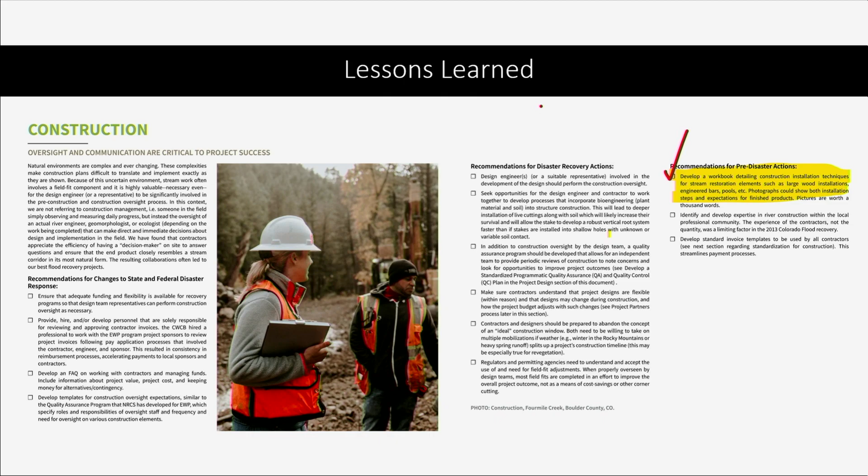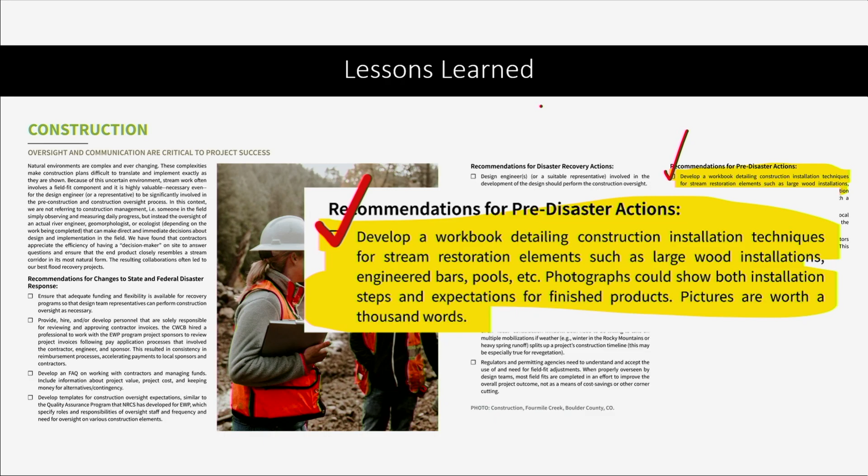We made this document by interviewing many of the folks that were in the trenches doing the flood recovery work to try to summarize the big ideas and give that information out to other communities. And so one of the big ideas out of construction was to develop a workbook to detail installation techniques, elements, basically try to create a document that could be worked with for contractors and for designers to bridge the gap. Okay, so we're actually following our own recommendation here with this new construction manual.

So looking forward now, after we've looked back at what we've done in the past and what we've gotten right and what we've gotten wrong, what are we trying to do here? Well, ideally, we're building projects that increase resiliency, increase processes and function in stream corridors. We need to assume change. We have to get away from the idea of static channels, right? So we're looking more to accommodating stream processes rather than trying to control streams.

We want to make sure that each project is going to be the best project it can be, regardless of which contractor gets chosen to do it. Okay, we can't just have our favorite contractors that do the work, but other contractors aren't going to do as good of work. If all of us are spending our money to do this restoration work, we want it to be great work.

So obviously stop making the same mistakes over and over, recognizing that sometimes less can be more. Trying to get away from the idea that we have to do all the things, bring out all the guns to make the work happen, but sometimes a lighter touch in our stream restoration work is important. And then we want to focus on the corridors, not just the channel. We've talked about that at length already, especially if you were here at the last session.

And then obviously trying to improve the knowledge base and expertise. It's us learning from all of you, and hopefully it's us infusing you all with some new information as well. But really this is a collective, and if you flip through this document, you might see some of your work in there. Hopefully you do. Hopefully it's in the good, and not so much in the bad. I'm sorry about that if it is. But we're all learning. I've certainly done things that I kind of regret a bit, like my younger self doing some work that I probably wouldn't do again if I had the option today.

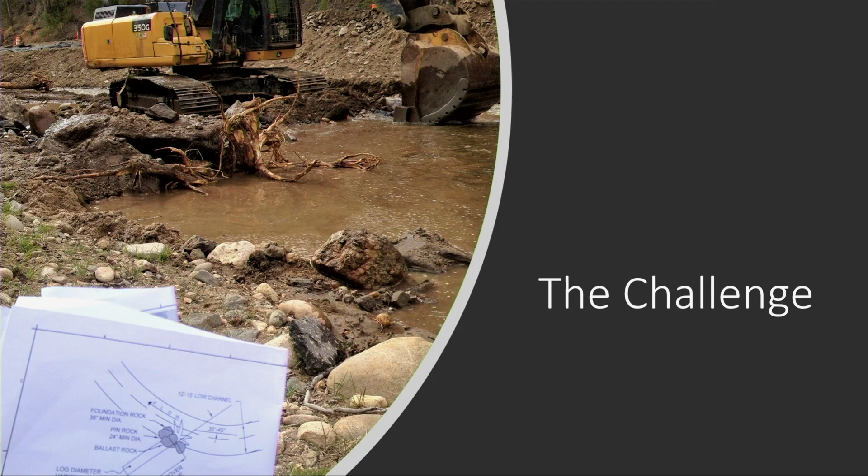And looking at plan sets that are well-intentioned and hopefully detailed and have all the different elements to them, but the translation of what that plan set looks like into what we want our stream corridors to look like, it gets lost a little bit. And so that's really a big reason for developing this construction manual.

So the vision is that, like I said to begin with here, there's an ethic of environmental stewardship. If we're doing work in stream channels, we hope the heck that we're doing it with an ethic of taking care of the land. We know that we should maybe avoid trying to overdo things and avoid some of the heavy hands that we have at times. And then, obviously, trying to naturalize a site and leave the site better than it was.

Can we do stream restoration work where when we walk away, maybe give it a couple years for revegetation to happen, but can we go back to a site and not know that there was restoration work that took place? Wouldn't that be amazing? How many folks have driven down a corridor and been like, oh, yep, can tell that was a project? Ideally, I'd love to not know that there's a project that happened there. We want things to blend in.

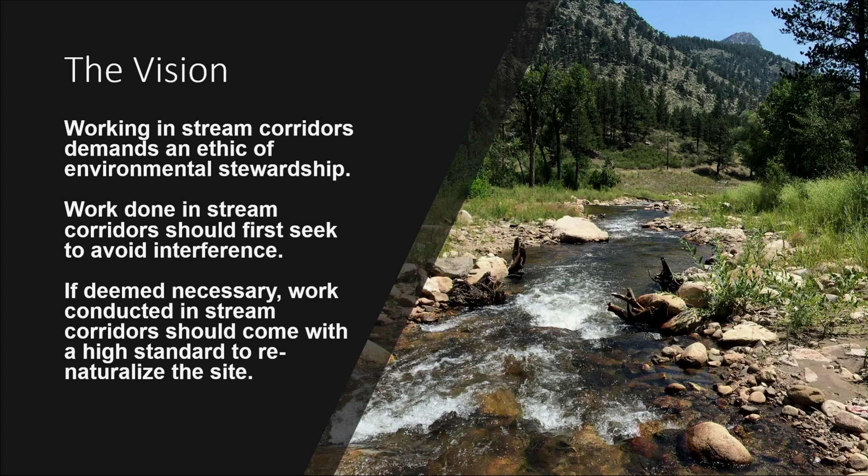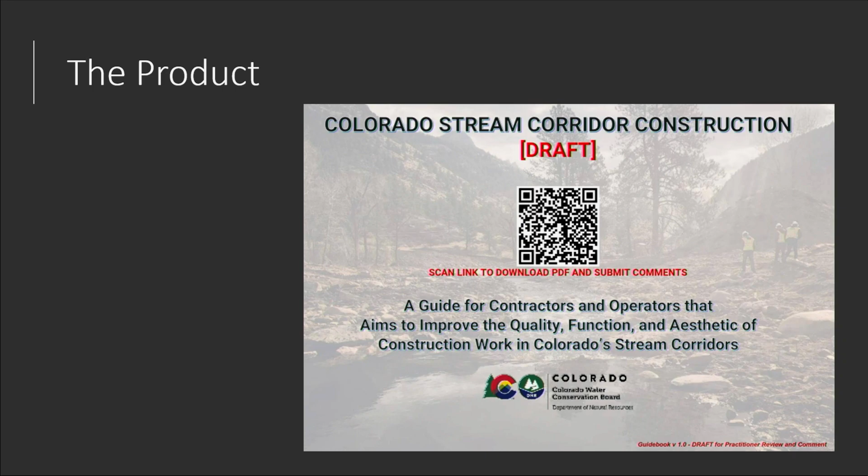When we leave the site, we want the site to look as natural as possible and, as soon as the vegetation comes in, have it over time blend in and just become part of the rest of the corridor. So what we did, we developed the product. The first printing is available on the display table at the Colorado Water Conservation Board's table, down in the basement there, whatever it's called. And I'll run you through just a few, in the time I have, of what we've got in the contents here, since you all can't look at it with me.

But essentially, we're trying to take the general practices that we find across the gamut of stream restoration and categorize them. There's a section on clearing and grubbing, and as Andy said yesterday, decompaction. I don't know how you did that. Decompaction. And then we've got a big section on channel shaping, bed forms, habitat, these typical elements that we'll find in a lot of restoration projects.

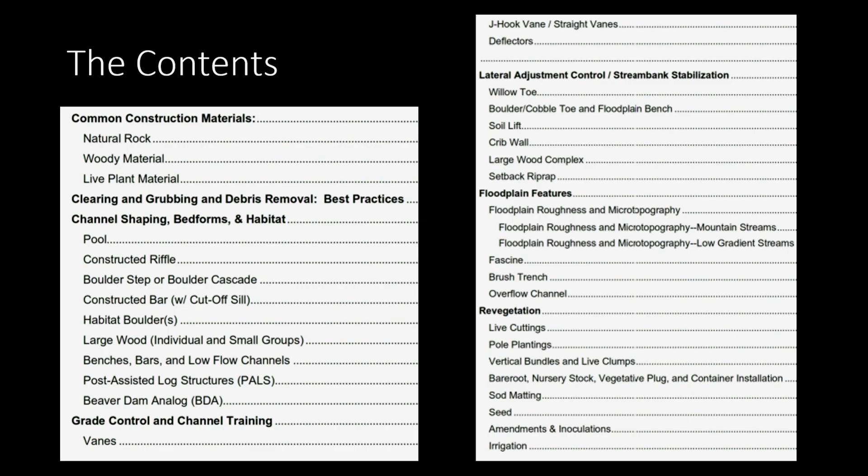We've got a section on grade control and channel training, another section on lateral adjustment control and stream bank stabilization techniques. We've included a topic on floodplain features, including microtopography for mountain streams and plains streams, kind of low gradient. And then revegetation, which is not all of our expertise, but trying to pull in the best information that we could find out there. So we hope that it's organized simply.

And sorry, I'm kind of realizing I might be cutting you all off. I'll go cut these people off on this side of the room.

So basically we want this to be a quick reference when you're in the field. Description and purpose of what the feature is. So you're a contractor, you're told we need to put habitat boulders in the stream, okay? Maybe you're part of a design team where someone else designed the project, but you're out there doing construction oversight, okay? There's habitat boulders, great. Maybe in your head you know what they are. Does the contractor know what they are?

Description and purpose, maybe why they're used. Other names that you might find, for cross-reference. Typical materials that are pulled in for these types of projects, the equipment that you might typically use to place these things, just in case there's any sort of, well, how do we build that? What equipment do we want to bring in? Installation fundamentals, the basics, right?

Try not to F this up, and hopefully you'll do a good job. Potential enhancements: these are good for maybe going to the next level, maybe a discussion that happens on site or in the design room or in the field with the contractor, trying to think about how to raise the standard a little bit. A lot of this stuff is trying to incorporate live cuttings or other materials into some of these structures at the time of construction.

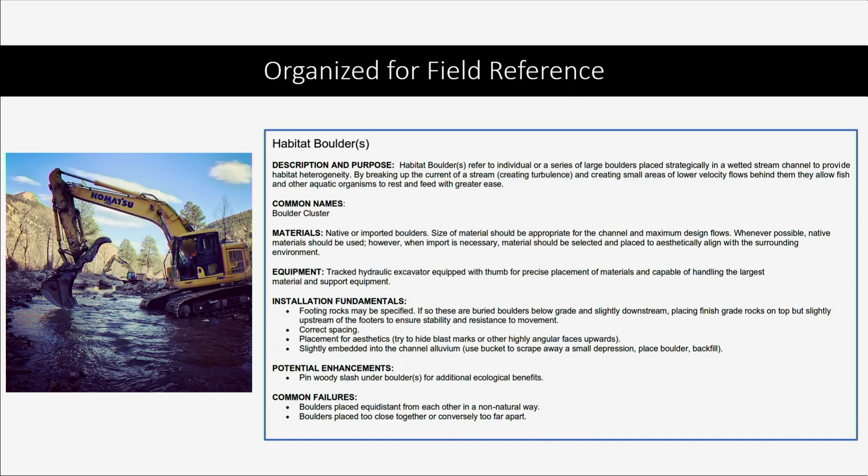And then common failure mechanisms, and this is what we witnessed in doing the measurable results program. It's what we witnessed from doing flood recovery construction oversight. So it's organized photographs. Pictures are worth 1,000 words, and we try to describe what we've seen from doing our construction oversight, and make it even simpler by quick referencing with green checks or a red X. Maybe not our idealized version of what we would like to see.

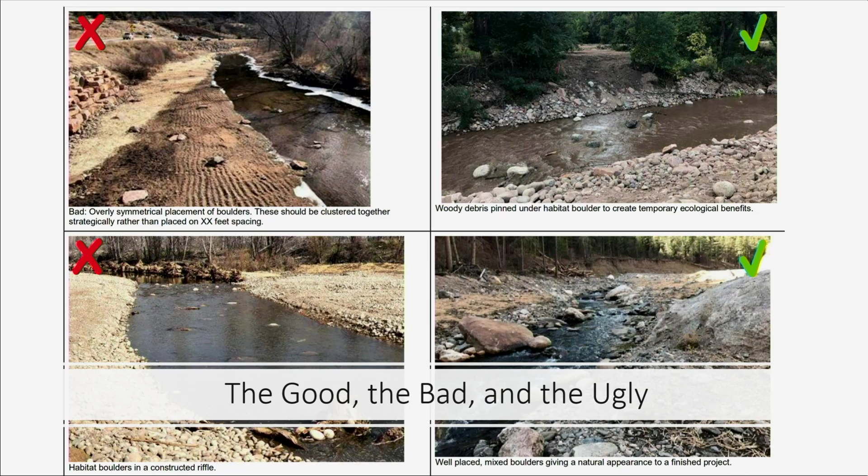We tried to include a lot of photographs of the construction process. If you all are building stream projects in the future, please document the process for us. There's a lot of good new techniques. This is not comprehensive by any means. This is a living document. We want the community to continue to contribute to this to make it better.

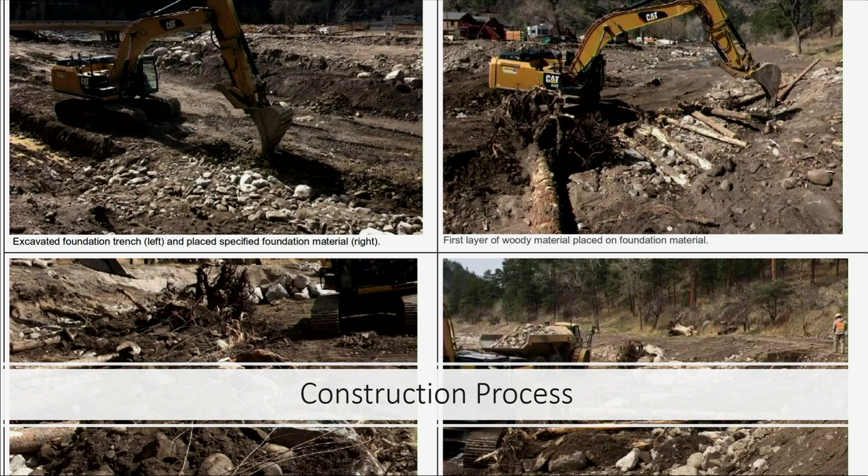But documenting the construction process, it's really nice to be able to go out there with a contractor and talk to them about laying a foundation. What does that look like? What is the first course? Maybe this is a large wood revetment. What might that look like? It's not going to be exactly the same. Obviously, each scale and each site is going to be different. But in general, rather than just using our words, now we have some photographs and other things to reference with our contractors.

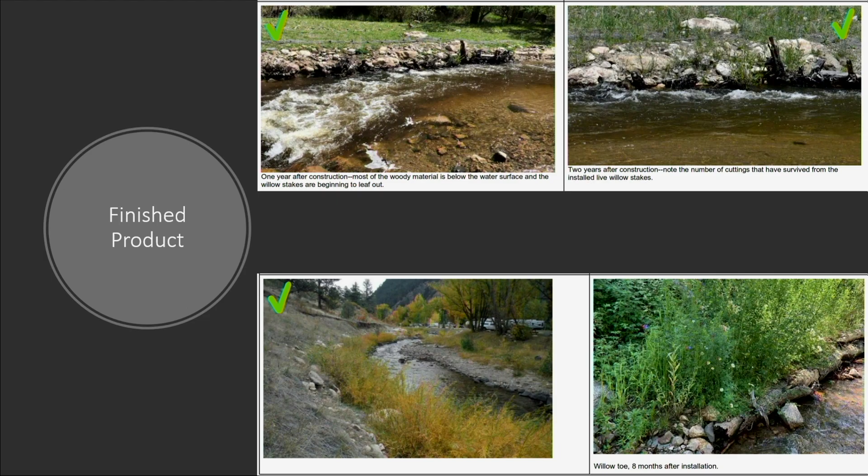Finished product as well, we feel like that's a great idea because we have these black and white CAD drawings. We have our arm waving, but maybe to show the contractors, this is what we're going for at the end of the day, or this is what this is going to look like in a couple years. So we tried to include photographs of that.

Again, sorry, not sorry. Some of the work that we've done out there can be better. I can critique myself as well, but there are some photographs of things that maybe aren't our best practice, and we don't want to continue to have those. We'd like to just raise the bar, I guess, is what we're trying to do.

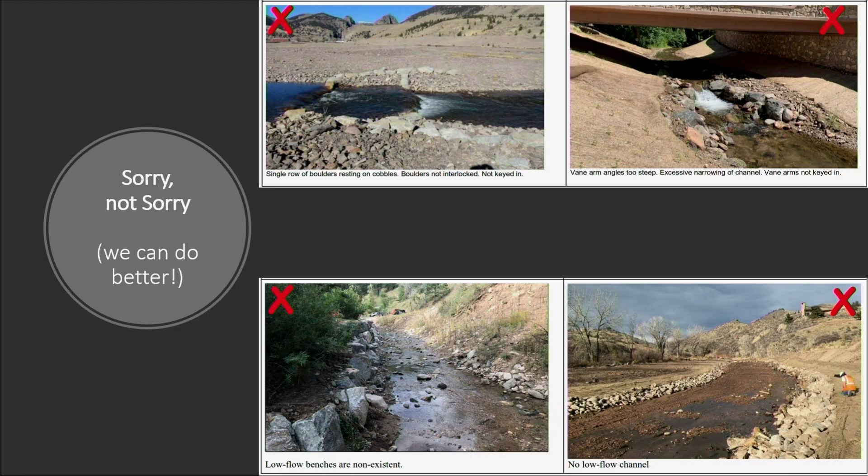So how can you reference this or use this? Hopefully, if you're a design team and you're recommending some of these construction techniques, some of these elements in your stream channels, then maybe you could consult the book to make sure that you're thinking about the construction process, how things are going to get translated from your design work and your CAD drawings in the field, maybe including some elements that you find in this reference into your design or your details. And then when you're in the field, maybe handing it to your contractor too, highlighting some things, circling some things, whatever it is.

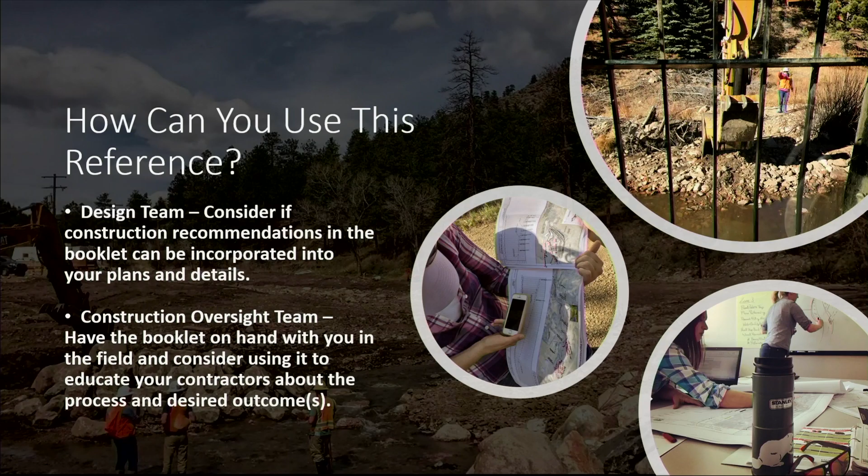And again, living document, I think I'm short on time. So this is a pole planting, right? I don't have a lot of photographs of it. The four of us couldn't really come up with good documentation. So please submit more of your ideas and more of your experiences to us.

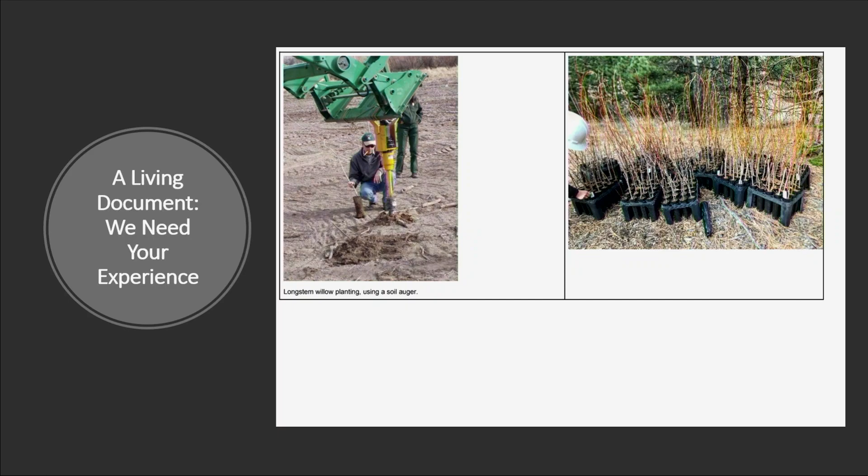And I think what I'd actually like to do, as I'm preparing this presentation and talking with some of my colleagues, maybe we'll also include a submit your new element form or something like that. Give us the description of what it is, give us some of the construction basics, some of the things that might go wrong with it, submit some photographs, and basically help us build this document for our entire community.

So, good on time? You're doing great. Great.

David, for you. Questions for me, or for the other peers of mine here that helped me write this document? Yes, sir. Hey, Morgan, sorry. I got a screen in front of you. I'm curious, I know the state's getting ready to update their design criteria. I'm sure you guys want to incorporate a lot of the structures. Are you taking some of this information and going to feed that design criteria, or how are those two things working together? Yeah, well, they will work together. Okay. Well, 'cause, yeah, I think that

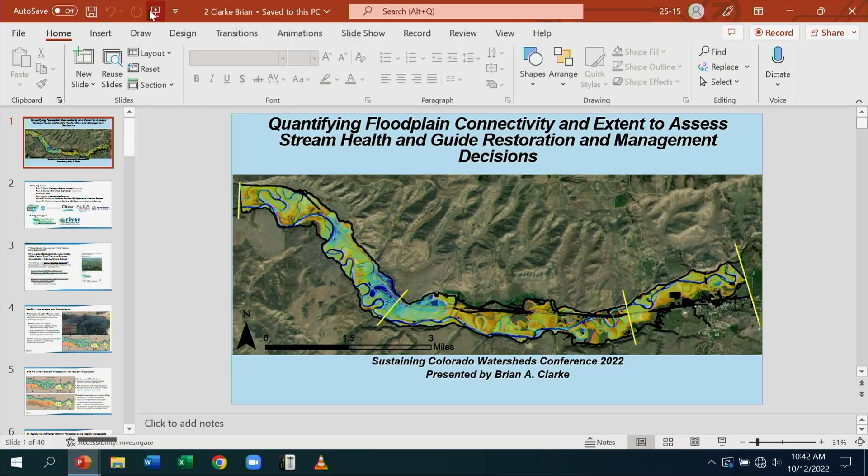Thank you, Michael. Great presentation. And just a quick reminder for everybody, I'll reiterate it too. This document's not a you should thing. Nobody told us you should do this. So if you're looking through it and you're saying, boy, they should have done a better job, start thinking about how you can make it better, because that's the request. Please commit to get some of your photos to us so we can make it better.

Thank you. Next up, we have Brian Clarke. He's going to be talking to us about how much space do rivers need.

Because of a shift scheduling thing with Batman, Brian actually fights crime by day and moonlights as a mild-mannered geomorphologist at night. While he normally only uses his powers for good, Brian's abilities allow him to cause avulsions simply by staring down the river. Rivers meander so they can go around Brian. And glacial retreat only occurs because Brian has entered the valley. While his work focuses on process-based restoration, conservation research, and fighting crime, his true passion is playing in rivers with his dog, Bella. And despite what anyone may tell you, Brian's actually 6'6". He's just always standing further away than you think. Same for me, buddy. Same for me.

All right, thank you. So yeah, we're going to be talking about quantifying floodplain connectivity and extent in order to assess stream health and give some guidance for restoration and management decisions.

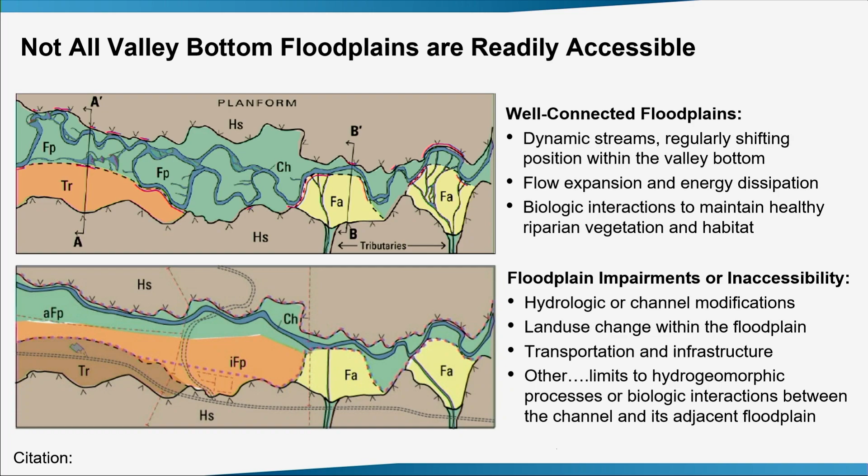And we're using those valley bottoms. So they are critical to people. People aren't gonna be grazing up on the hill slopes or living up on the hill slopes most of the time. So we use those valley bottoms, and that limits the width we have in the valley bottom. Not everywhere can be a stage 0 beaver meadow, as much as we might want it to be.

Oh, and we have a double slide.

Okay, so our question comes down to, how do we quantify how well connected a healthy riverscape is, and how do we quantify the floodplain restoration potential and targets for improvements?

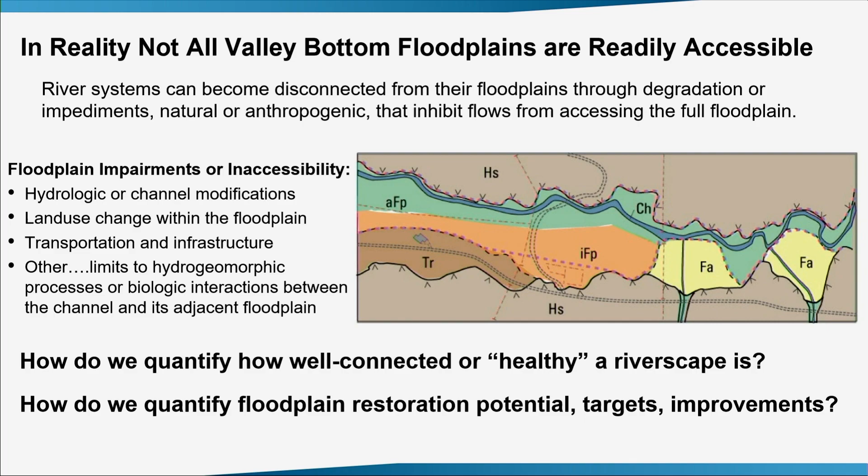And so this is our same slide, which should have been the only one. Okay, we'll go in the right order.

So in order to get at that, we're gonna go inside the valley bottom margins, or FHZ boundaries. And so the first thing we do is identify our maximum potential floodplain extent, and that is the maximum plausible area that could interact or be influenced by floods or fluvial processes under a natural flow regime. And so this could be the same as a riverscape margin, this could be the same as a fluvial hazard zone boundary, or this could just be identified as the historical or natural floodplain.

So the next thing we do is go inside that valley bottom and look at the active floodplain extent. Oop, this isn't working. So, and that's areas where inundation during either frequent duration and frequency by either low or moderate flows, that's kind of the bank full to annual, maybe the 2-year event, are capable of maintaining that riparian vegetation, those biologic interactions, and keeping healthy geomorphic and ecological processes.

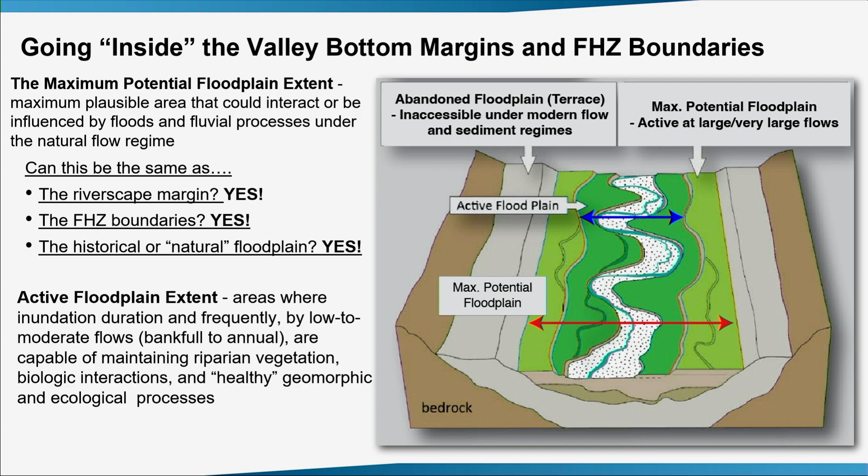And so once we've identified those two areas, then we can look at the floodplain connectivity ratio. And that is really just a proxy measure for the proportion of the valley bottom that is actively and routinely engaged by those moderate to frequent flows compared to our full floodplain width. And so we're looking at just those moderate flows compared to areas that are activated versus the large and very large flows.

And so to just kind of give some examples of how this worked, we've got some selected sites from our Yampa remote assessment work. And so first we're gonna look at something with some moderate resolution data. This is right near the town of Craig as an example, and then we'll move on to these priority areas where we apply some higher resolution data.

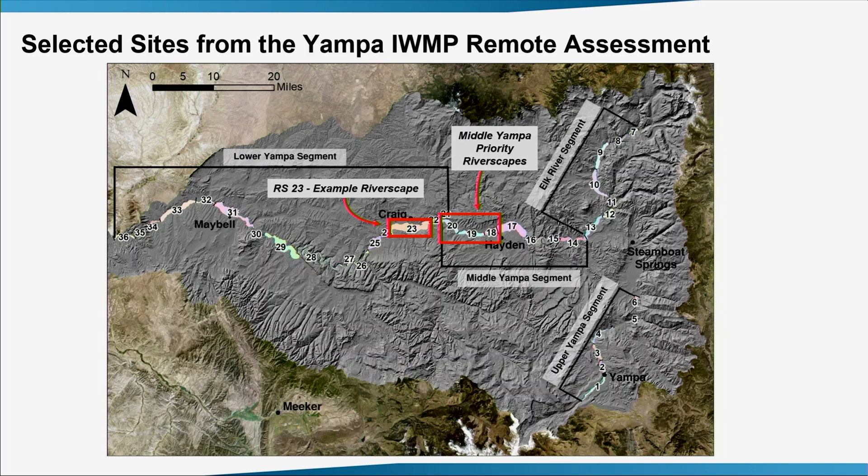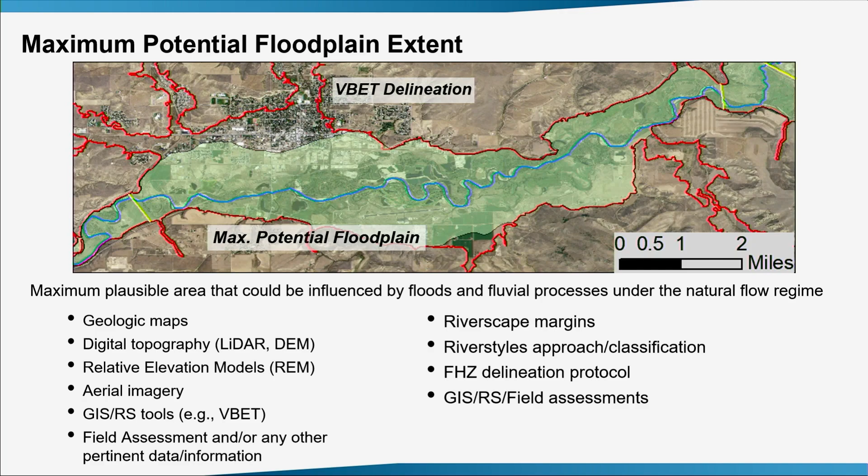So, first we start off with our maximum potential floodplain extent, which I think a lot of us have done using any of these techniques. We pull out the geologic maps, digital topography, relative elevation models, all the way through our whole toolkit. And here we applied the VBET delineation, and then we came in and modified that based on these other components to narrow it down to a maximum floodplain extent.

So the next thing we want to do is identify what is that active floodplain. You know, where is that nice, lush, green riparian corridor that goes through the valley bottom? And so the components we use are floodplain fragmentation by either development or transportation infrastructure. We identify a threshold elevation based on relative elevation above the surface that delineates right where the upper limit of that active floodplain is. And then we use comparisons and verification from aerial imagery, geologic mapping, topographic cross-sections, whatever information you have to really narrow that down.

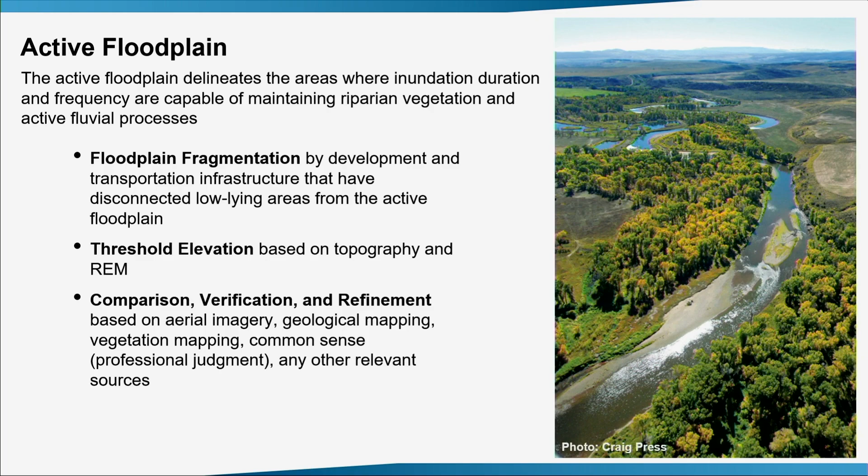So the next step is to identify our active floodplain threshold elevation. And again, it's a relative elevation above the channel. We'll get more into this later, but here you can see an example where we've, from other sources, identified kind of an active floodplain, and this is the active floodplain threshold elevation. So it's the height above the surface. And so this encompasses the floodplain, the active floodplain surface, and any inset fluvial features, as well as the channel.

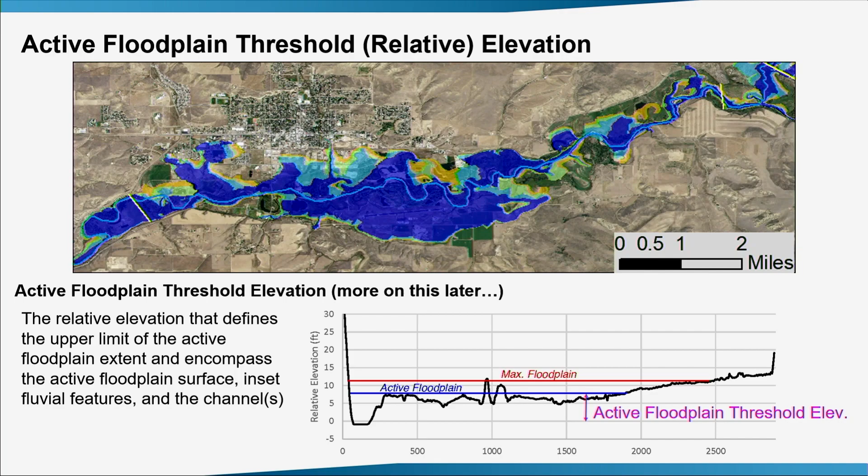And then from this, we take our floodplain fragmentation shapefile and just clip it. And so there we've knocked it down so that our active floodplain is now all land below that threshold elevation that is not inaccessible or disconnected by the transportation network. And so once we have our active floodplain, we can get a floodplain connectivity ratio where we just take the active floodplain extent divided by our maximum potential floodplain, and here we have a floodplain connectivity ratio of 52%. So 52% of our valley bottom could be occupied by that active and healthy riparian corridor.

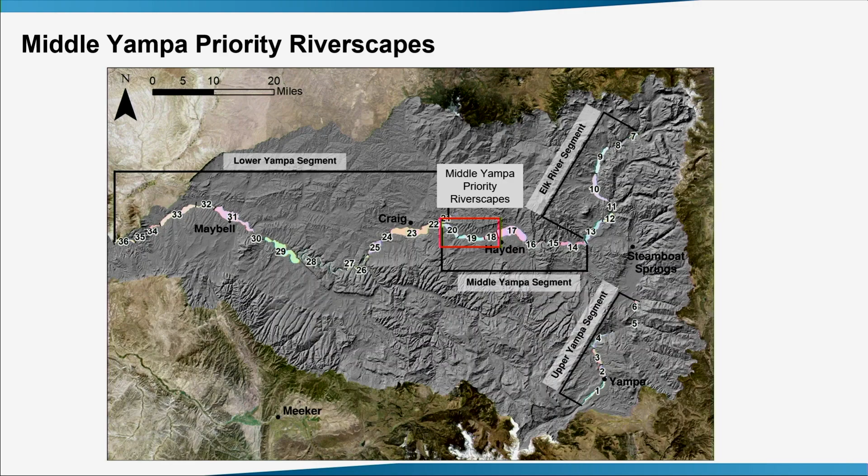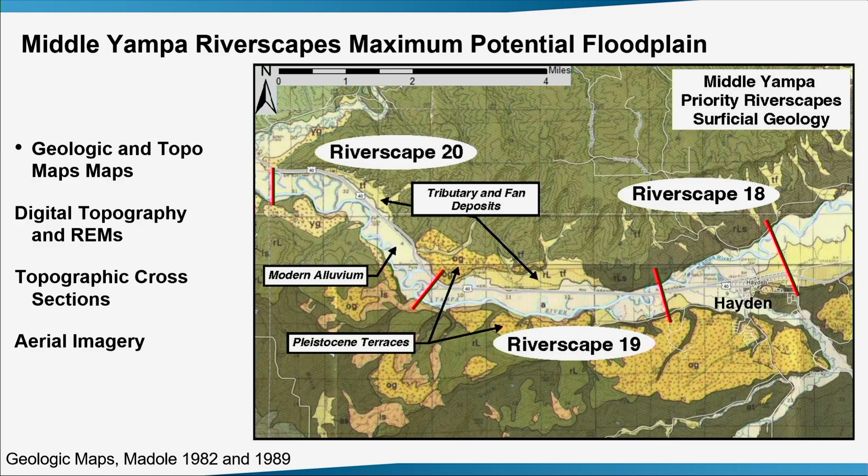Okay, so if we move to some higher resolution data, in the middle Yampa, we will look at 3 riverscapes right in a row. And so again, I'll kind of breeze over our maximum potential floodplain, but here in the general setting we're right by the town of Hayden. We have kind of a wide valley bottom. In this area, we have Pleistocene terraces that are actually perched up on top of the bedrock on our valley margins. And then we do have tributary deposits and alluvial fans that are coming down into our valley bottom. And as you can see here too, we also have the town of Hayden as well as a transportation network. Here, this is US 40 as well as the Union Pacific Railroad that come and cut through this area.

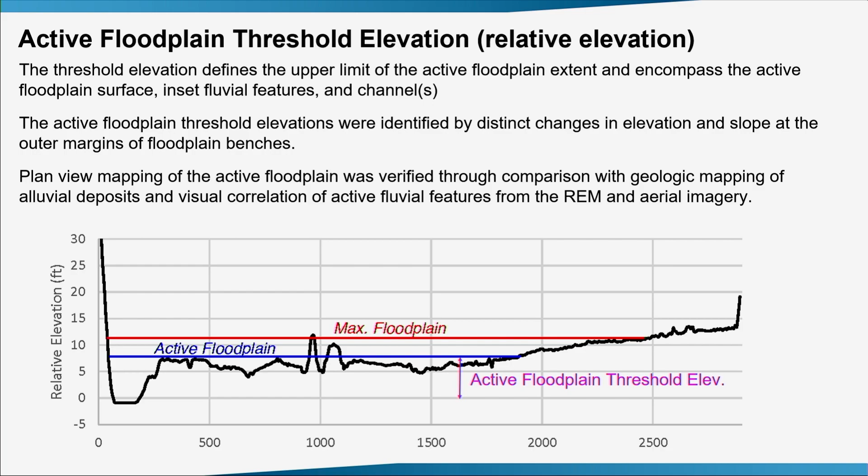So to get at our active floodplain threshold elevation, which is now a mouthful while my mouth is dry. So here, to get through this, we take a series of things where we take a whole bunch of cross-sections to go across this area. We look at all of our aerial imagery. We look at the relative elevation models to try and get the relative elevation to match up with where we're seeing those active fluvial features as well as the riparian vegetation. And it's not just one cross-section. We do numerous cross-sections all the way through to get a better sense of what this looks like.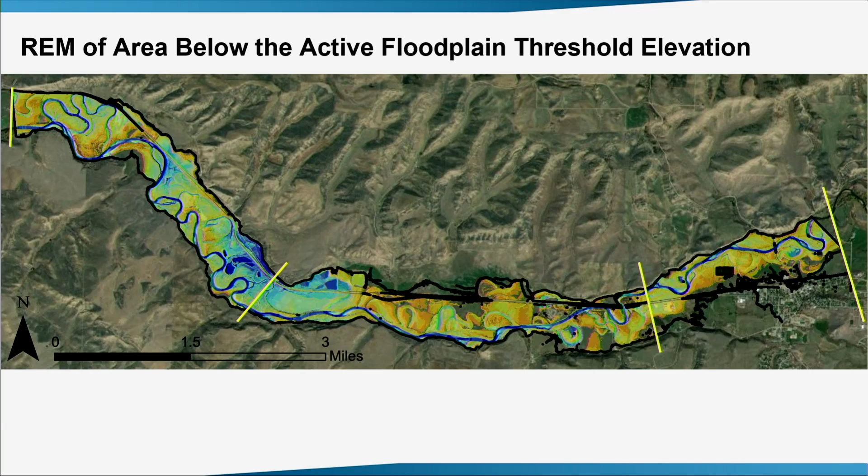Oh. I don't know what that is.

Well, what we would do is we would clip it, and you'd see a really pretty picture of what those active floodplains are, as well as the maximum potential floodplains for each of those. And the points would be that we can see in this area here, where we have the town, we have more development, transportation networks, and so we've clipped that down a little bit further. In this middle floodplain, it actually is almost bisected by US 40 and the Union Pacific Railroad. So almost immediately, we could at most maybe get to 70%, but even with that, we have some raised agriculture, pasture land, some development in there. And so we've cut it down to 60% of that valley bottom is accessible floodplain.

And then as we come a little further down into our Riverscape 20, the whole floodplain would be accessible, except it's cut off by US 40 and the railroad, which have then been pushed up against the margin of that valley bottom. And so in this area, we actually have a much wider active floodplain, which we do see in the imagery, where we see really great riparian vegetation, lots of fluvial features, and it is active at those frequent to moderate flows.

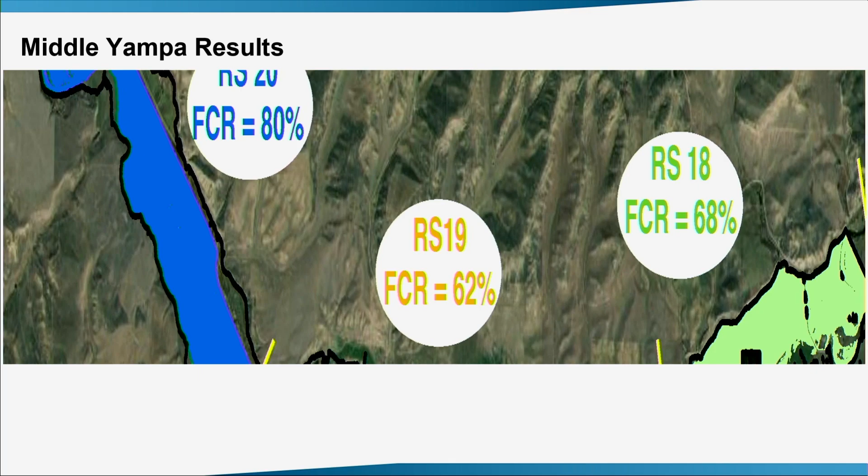Let's hope this one works.

So likewise, we could use this to set targets for floodplain restoration and identify areas for improvement, such as low-hanging fruit, specific impairments. If we want to target specific aspects, we